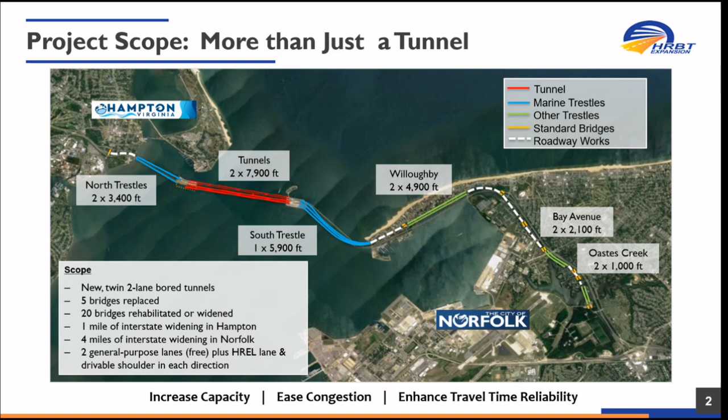But for the tunnel, we are about a 10-mile project. The scope of the project is, besides just the new tunnels, the entire corridor will be expanded to 4 lanes in each direction. 2 lanes will be general purpose lanes, and the other 2 will be managed lanes, tolled managed lanes with the express lane model. So if you have a HOV with a flex pass, you go through with no toll. If you're a single rider, you can choose to pay the toll.

A couple stats I'm contractually obligated to go through. We awarded the contract in 2019, notice to proceed in September 2020. That gap is pretty important — during that time we went through our environmental permitting process, which was a large risk on a project of this size given the different impacts within the waterways. That was an interim step to be sure we could procure all the necessary permits, which we did within that time period. Project cost is $3.9 billion.

It is a design build project — I think most of you are familiar with the design build delivery model. Project funding is very unique for a project especially of this size: only 8% of the funds are state and federal funds, 92% come from our regional gas tax. That's administered through HR TAC, the Hampton Roads Transportation Accountability Commission, who collects sales tax in the region, used for large projects in the region — the 64 widening up towards Williamsburg, the high-rise bridge, those types of projects. So pretty unique funding on a project of this size.

For our project partners, VDOT is the owner — we will own the facility when it's done. It is not an operate-maintain model with a concessionaire; VDOT will be the owner after the project. Again, HR TAC is our funding partner. Hampton Roads Connector Partners, we call them HRCP, are the design builder. They're a joint venture of Dragados, Vinci, Dodin Campenon, and Flatiron — large international firms with tunneling experience. Also, our designer is a joint venture of HDR and Mott MacDonald. So those are the main players on the team.

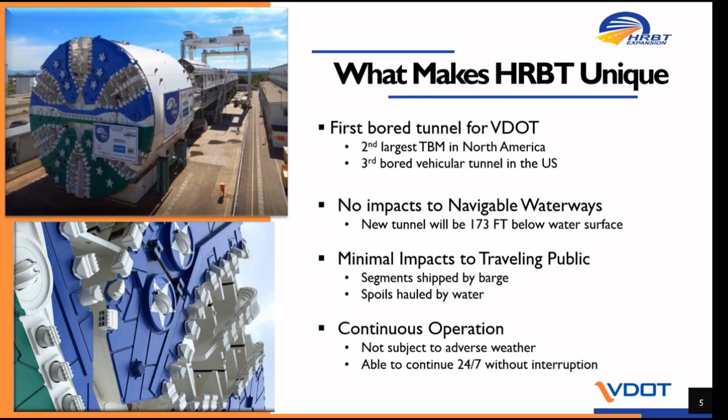You're probably also familiar with the Chesapeake Bay Bridge Tunnel - they're in the process of boring their first tunnel, so they're right behind where we're at. One of the main reasons this method was chosen was the impact on navigable waterways. Here in Hampton Roads, home to the largest Navy base in the world and the deepest port on the East Coast, it's very important to maintain the channel, and that would have been extremely difficult with an immersed tube tunnel. Given the technology advances with bored tunnel technology, even though we have soft soils in this region, it did become the selected alternative to build the new tunnels.

So what's in the name? We do name our TBM - ours is named Mary. It's traditional for boring machines to have female names after Saint Barbara, the patron saint of mining. We put out a contest to local school children to name the machine, and the selected name was after Mary Jackson from the movie Hidden Figures.

Anyone seen the movie Hidden Figures? This is my audience - thank you. The response isn't always that overwhelming. So you all know the story of Mary Jackson - she is the namesake of our TBM.

The cutter head - does anyone know we had a Hampton Roads flag? Maybe less response on that one, but we do. All the stars represent our member localities, the blue for the ocean, the green for the land. That's the significance behind the cutter head design.

Again, this is the second largest TBM in North America: 46 feet diameter, 430 feet long, 4,700 tons, 9.8 million pounds. It's a massive machine. The picture in the upper left is the TBM at the Herrenknecht facility in Germany, where it was built, fully commissioned, disassembled, shipped to the United States, and reassembled for use here on the project.

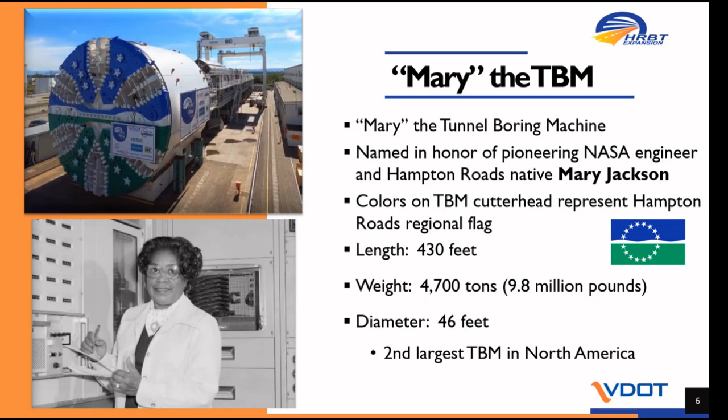So what is a tunnel boring machine, and how does it work? There are a couple different types of TBMs. The first tunnel boring machines went through rock, but we don't have a lot of rock in this area. There are earth pressure balance machines and slurry machines, each with different capabilities. Our machine is relatively unique - it's a combination of the two, a variable density machine.

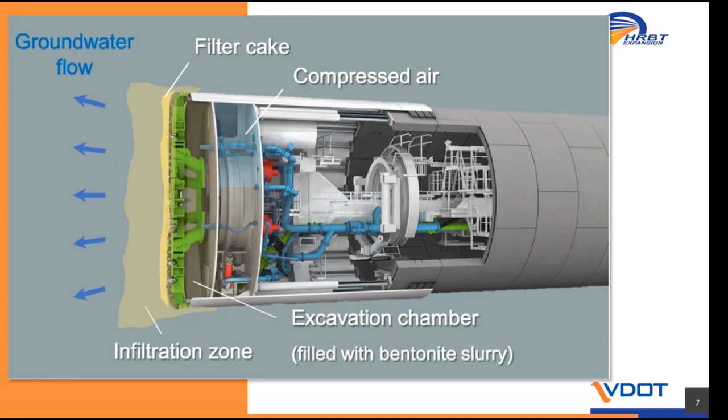The other piece to highlight is about the middle - there are hydraulic cylinders just ahead of the gray rings. To build the tunnel, it's a series of rings, each made up of 9 segments. The machine advances as we build a ring - the cylinders push off the ring behind it, retract, we build another ring, push off, retract, and build rings again. It's that process over and over. Each ring is about 2 meters long - that's how the machine advances.

This is a cutaway of what the existing tunnels look like on the left versus the new tunnels on the right. You can see the new ones are deeper. The channel will always be limited by the existing tunnels, so really the reason for going deeper is that the machine likes to dive down to the more compressive soils - it dives down, gets there, bores, and then goes back up. You also see slight curvature away from the existing tunnels, which was to minimize any risk of impacts to them.

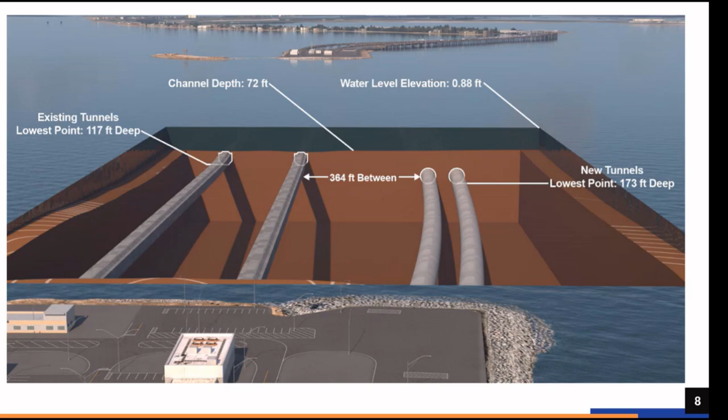This is the interior of the tunnel. The new tunnels will have, on the left side, egress corridors for the event of an emergency within the tunnel. There are spaced doors within the tunnel that motorists could evacuate into that corridor and move out. It's a fully pressurized tunnel, so if a door were open, it would not allow smoke to come in - a pretty advanced system, similar to what we built at the new Midtown Tunnel.

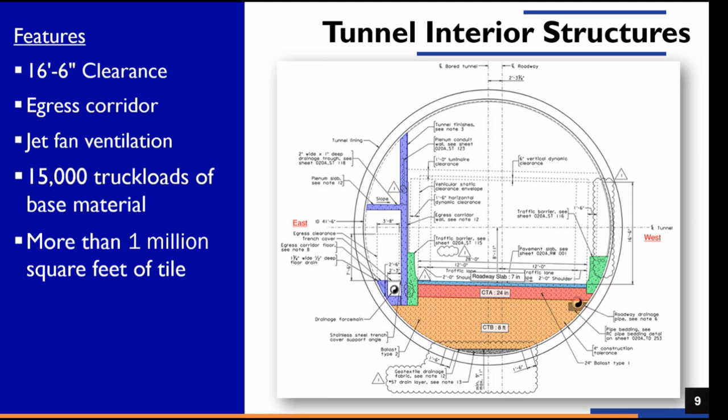Above that space there will be jet fans for a longitudinal ventilation system, different from the existing tunnels. The existing tunnels use a transverse system where fresh air comes in the bottom, gets pulled up into the upper air duct, and pushed out both directions. This will be different - there'll be large jet fans within the tunnel.

So looking at progress, we're starting on the north side in Hampton. This is Mallory Street. It's the kind of project where pictures don't stay current very long, and this is one of those.

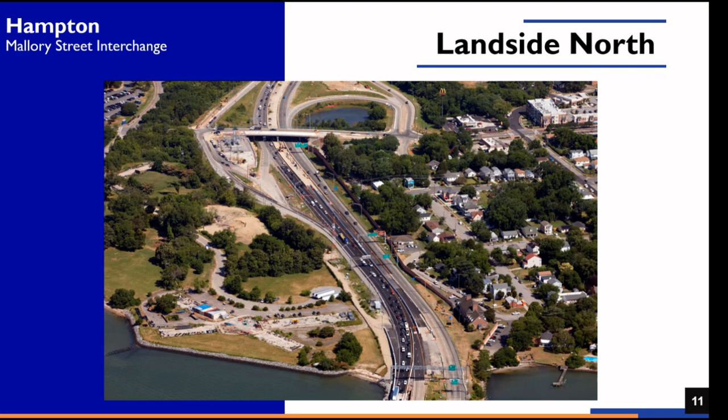At the top of the picture is the Mallory Street Bridge, which we are fully replacing. The half closest to the camera here was recently opened to traffic, and they're demoing the old half to be able to fully widen that bridge.

This is the north trestle, again on the Hampton side, eastbound. Earlier this year, we put traffic on this new portion of the trestle. You can see ultimately this will lead into the new tunnels. Upper left is a temporary trestle that puts traffic back into the existing tunnels in this temporary phase. You can see at the bottom the pinch point of why we had to put traffic onto that trestle to build the rest of the bridge.

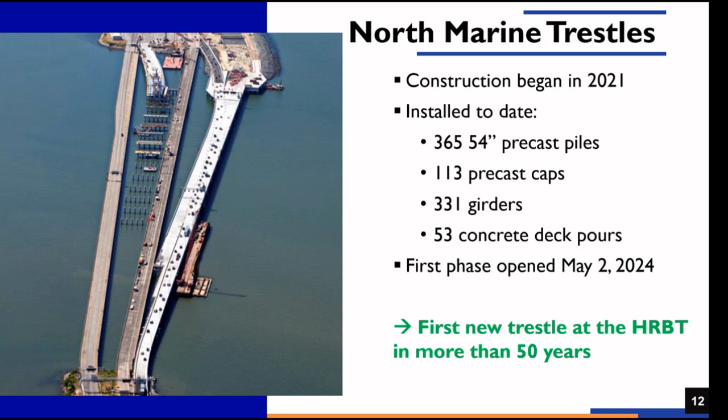We'll have to demo the existing bridge. We are fully replacing all of the bridges leading up to the tunnels, so with that comes some pretty complicated phasing to maintain traffic. You can see some of the stats here, just the sheer amount of work that goes into building those bridges. This is the first time in over 50 years that we've built a new structure out there to put traffic on. Those structures have pretty much met the end of their service life, or they would have in the next 20 years required significant rehab. So we are replacing them as part of the project.

Going to the North Island, this is the one closest to Hampton. You can see Fort Monroe there in the background. We did expand the size of this island, more than doubling it to be able to receive the new tunnel.

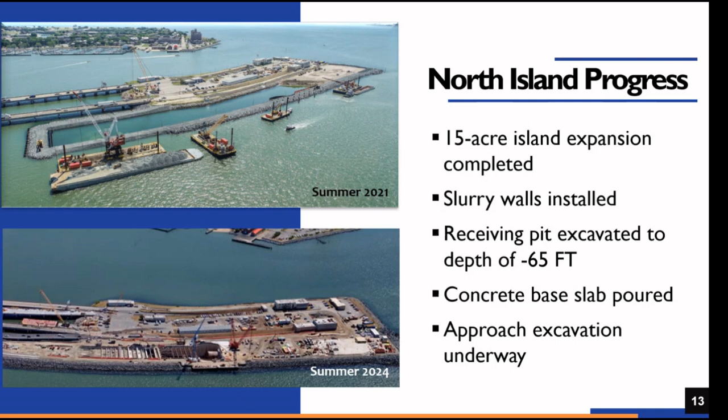Moving to the South Islands, this is really the home base of operations for the tunneling. The bottom left of that picture is our slurry treatment plant, where all of the material that comes out of the tunnel is recycled. The spoils are separated to put on a barge to go for disposal.

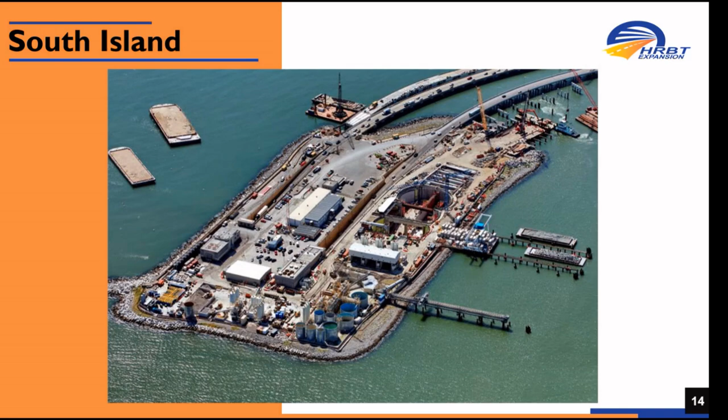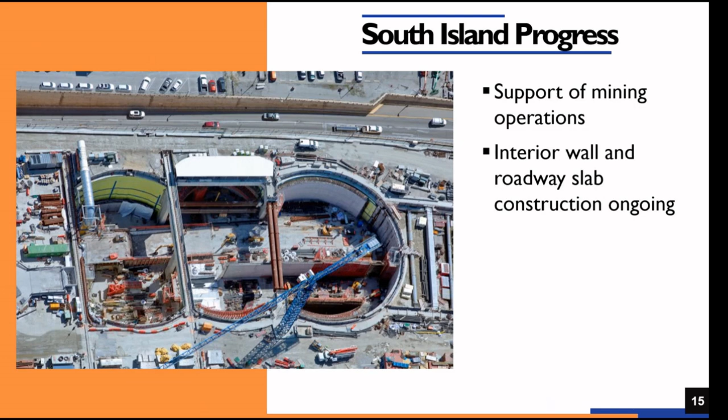So this is the shaft. To start, we had to build this large shaft because the boring machine needs pressure at its face, so we couldn't just start from the surface and dive down. By building this shaft, we're able to lower the machine into it. We actually did ground improvement ahead of it to give it solid material to bore through, and this was the launch of the boring operations from the South Island.

The South Marine Trestle, moving towards Norfolk, is going to be a large 8-lane structure. Again, a large structure going into Norfolk. We are planning on shifting traffic onto this structure next year.

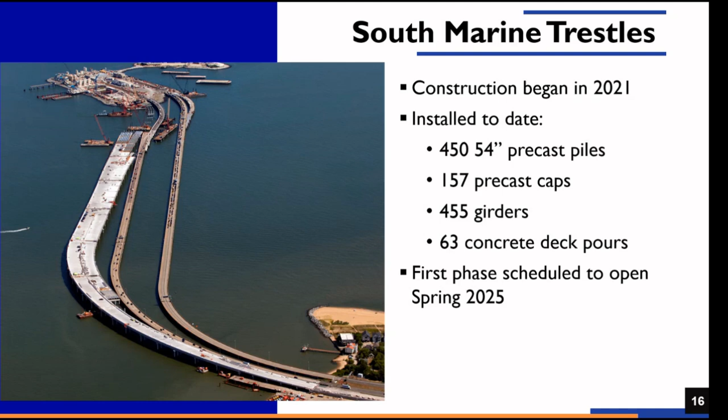I call this an engineer's Rorschach test. Depending what kind of engineer you are, you see different things. I'm a traffic engineer, so I see all the traffic stopped right there on the bridge leading up to the tunnel. Then they zoomed in on it for me to add stress.

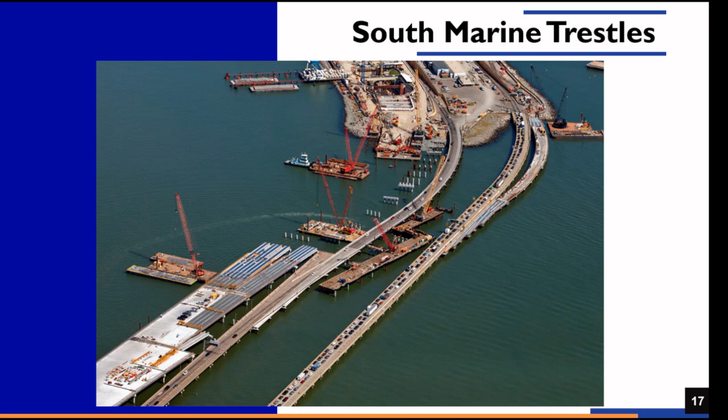This shows the westbound tunnel, but you can see the temporary bridge to the right that we're building so we can put traffic there to be able to demolish the existing portion of the bridge. On the left is the eastbound side. We did that same thing last year, putting traffic on that temporary structure to build the existing structures. That's one of the large challenges of this project - we're landing all these bridges at the existing area, so we have to move everything out of the way onto temporary structures just to be able to build permanent structures. So, complicated phasing that we're working through.

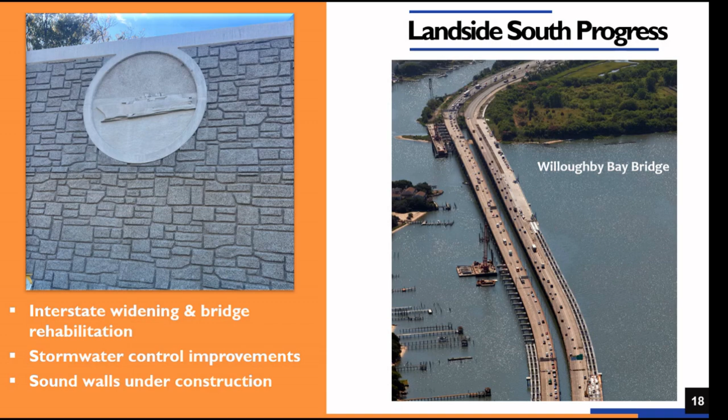On the landside progress, we're widening everything. One unique aspect of this project is we're doing it without acquiring any new right-of-way, so it is a very constrained corridor. We're basically building everything to the median, taking up the median with barrier, and rehabilitating all the bridges in the corridor. This landside work would be a large VDOT project by itself, but combined with the tunnel, there's a lot of coordination going on, with various bridges in the corridor getting rehabilitated as well as widened.

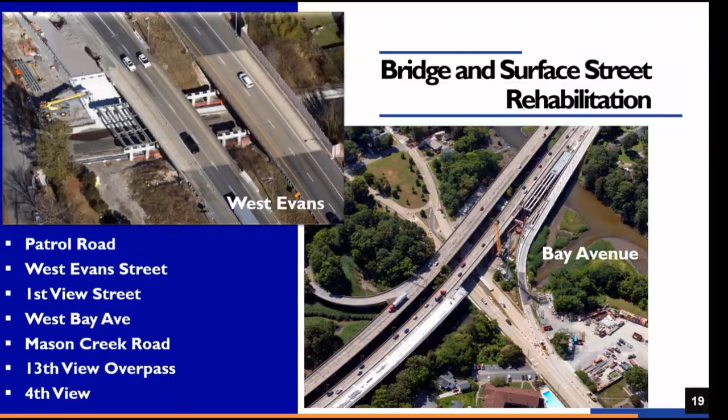As far as the mining and tunneling, we commenced the first bore from the South Island. Started last year - each bore takes about a year evolution as it advances.

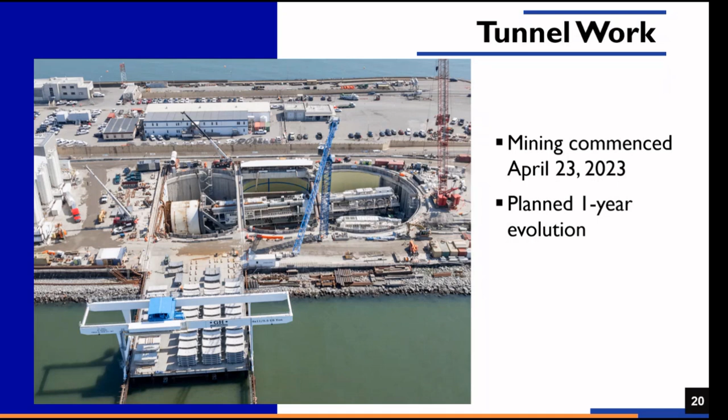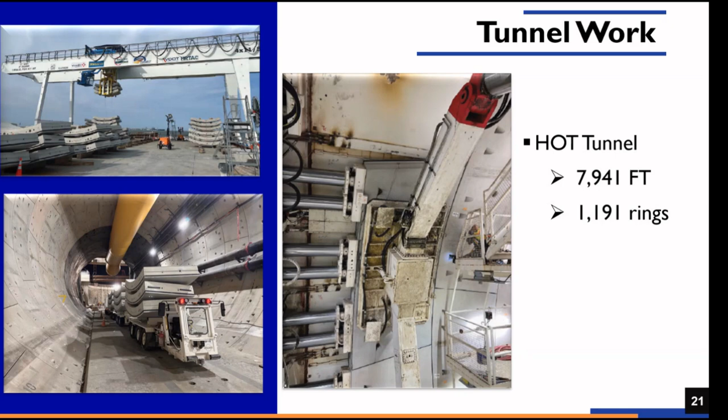So again, we have that process of pushing off, building a ring, pushing off. Really progress normal is about 50 feet per day. Some limiting factors: after boring, we got to put the material up, and it takes time to process those materials. Also because they're all barged off, if there's weather, such as today, even with the winds, any type of craft advisories limits the movement of barges. So we only have about a day's worth of capacity to store materials there before we become muck bound and unable to move more out. So it's really a delicate balance of boring, processing, removing materials.

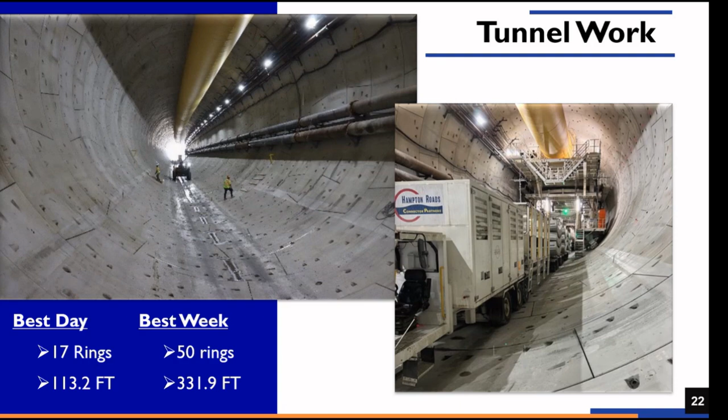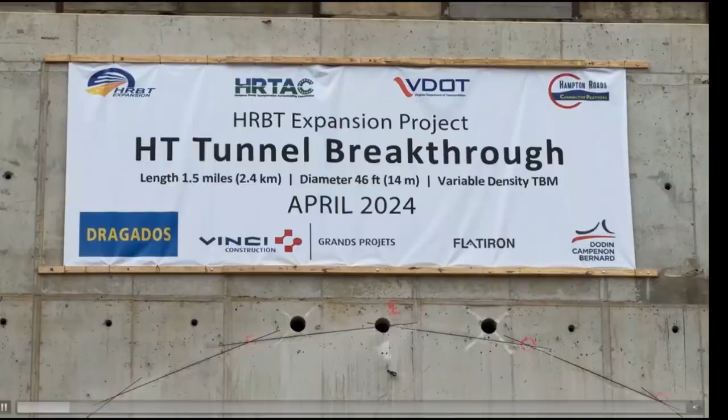But you can see some of the stats of some of our production. So with that first evolution, we got to April earlier this year for our big day, as you can see here.

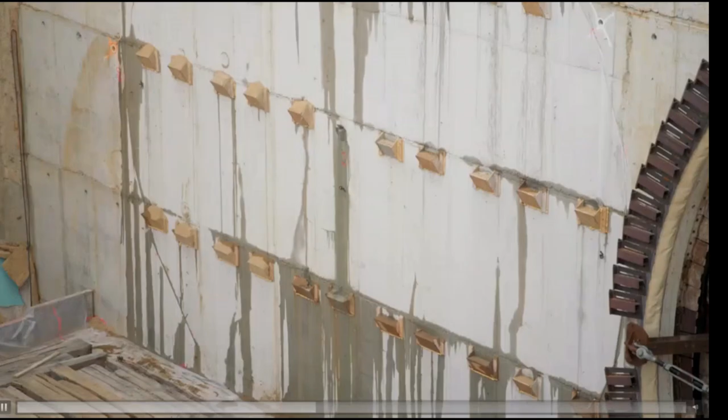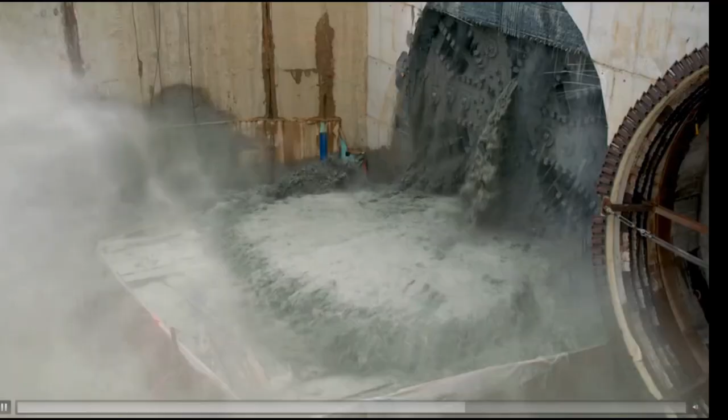So you can see that slurry material behind it that's constantly used in the process. And so it was the breakthrough of the first tunnel, which officially made it the first bored tunnel in Virginia.

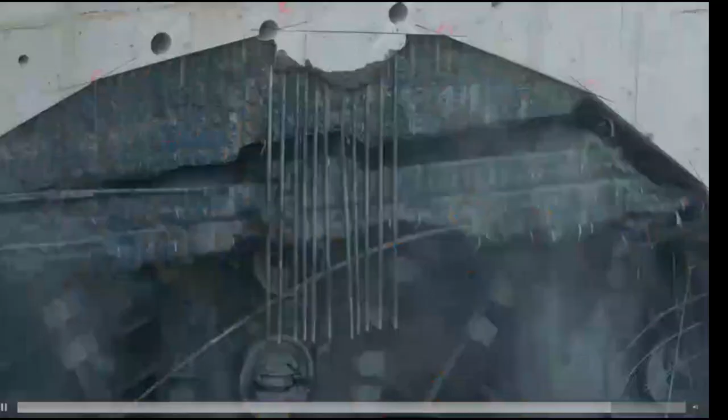So once we broke through, you can see the person there kind of get some sense of scale. It's a big machine.

So now we had to turn it around to go back the other way. So that created the next challenge. We use some technology that's been used in Europe before, but this is the largest use of it.

The bottom of this picture, that's what we call a nitrogen skate. So really on that cradle underneath, there's some rubber bladders that we injected nitrogen into, and then on the bottom surface, steel plates that they lubed up with oil.

So really what happened is once they did that, you can see those pulleys were actually able to pull the machine around into place. It reduced the friction just enough. I kind of think of this as a combination of an air hockey table and those little pads you put on your sofa to push it around. Kind of a combination of those two. We're able to actually move that whole structure around.

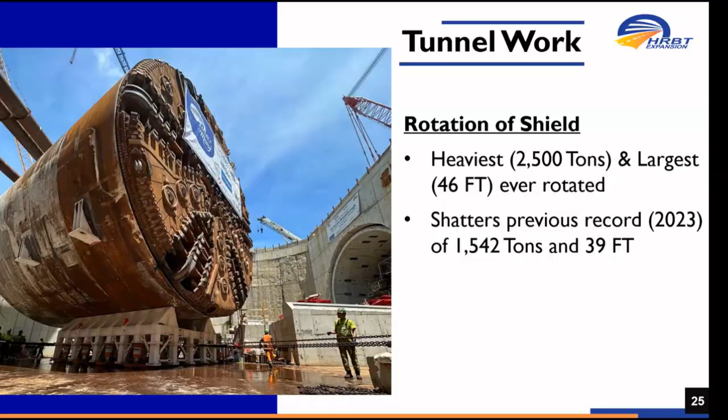So this is a time lapse of what that looked like. Really this all happened in one 8-hour shift. It was pretty impressive how they did it. And again, this is the largest piece of equipment they've ever used with this type of technology. So they turned it right around and put it into place.

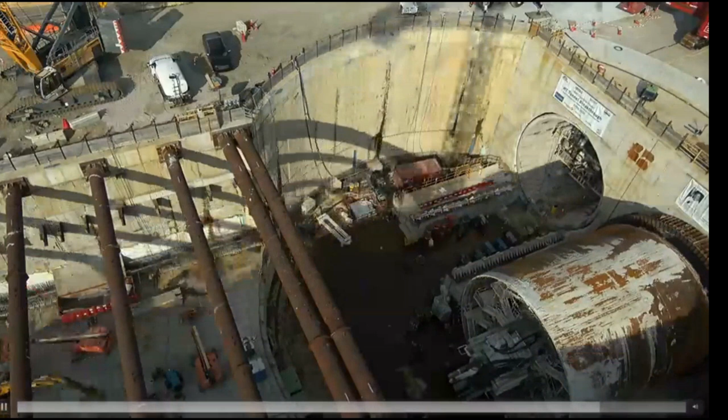Next in line, each of the gantries behind it are being one by one pulled out. Because they're so large, they can't turn them around in the pit, so they actually use cranes, bring them up to the surface, turn them around there, lower them back down, and put them in line. As of this week, we've turned around 3 full gantries and pulled the 4th gantry out of the tunnel. So as of this week is the first time we have a clear path from one end of the tunnel all the way out to the other end, light at the end of the tunnel, literally.

So this project, you're probably familiar with federal contracts. Civil rights goals are included in all of them. Typically, it's a percentage of a project, and it's no different here. The one difference here is just the size of the project makes those percentages a really big number. But we are meeting all the goals that we've put on this project for civil rights, so I'm proud to say that.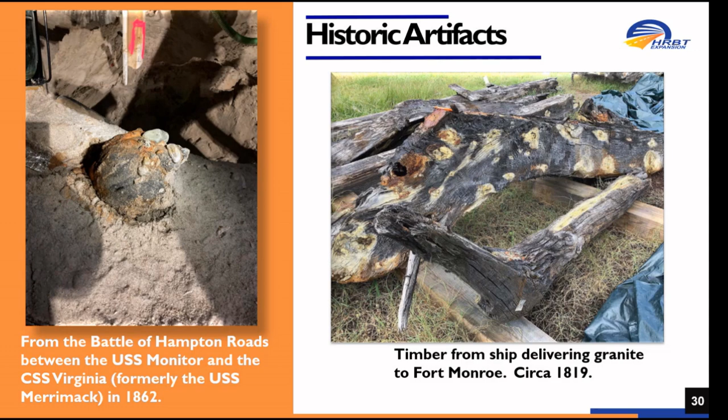And then the one that nobody had on the project bingo card going in—you probably all know, you go through all your risks, what are the possible risks. As we were mining last summer, the material goes through the machine, and once it gets to the slurry treatment plant it goes up a conveyor. There are some magnets on there to pull out any metal debris or other things. But as they were mining, someone spotted something that looked a little different, and it was mastodon bones.

So again, working with the agencies, they were able to identify what they were. There's a couple of different pieces that we have on display at the visitor center when it opens. We're told this is the furthest east they've found these bones, and there's probably more down there. These were over 100 feet under the ground, below the river, really in some soils that haven't been disturbed for at least 50,000 years. That was an interesting find, and not one we expected on the project.